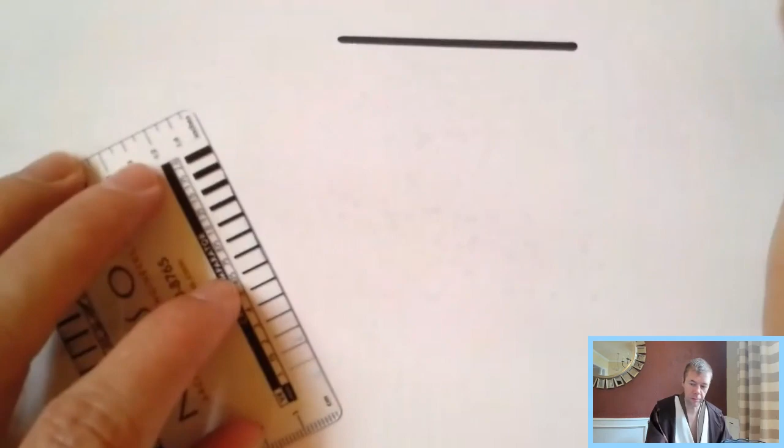Let's see here. I think this is the one I want. So let's talk about walls for a second. My class is doing a project where they are designing a building, and they get to pick where their wall system goes. Some of them are a little bit nervous. They're like, I don't know where to place it, I'm kind of concerned. That makes sense. I know I was really nervous. I didn't want to mess it up, right? And I get that approach.

Now I'm going to start out with a very, very simple structure. Just rectangular, straightforward, because you need to understand these before you can understand the more complicated structures. In this system, let's just say I have my walls over here. I have one wall here, and we'll make it really easy at first. We'll make them symmetrical. We'll do a wall here, and a wall here. And let's make those walls the exact same length. So just start out with something pretty straightforward, pretty easy to begin with.

So if I have some kind of wind load, we're going to start out focusing on wind at first, and then I will get into earthquake at the end, just a little bit. If I have wind coming in from this direction, blowing here, then what I can do is, since these walls break my system in half, and since they are the same length, I can kind of chop this in half. I'm going to take half my wind, half my tributary area for my wind, and break it in the middle here. Hopefully that was in the middle. Should be in the middle. Well, not quite in the middle, but let's just assume it's in the middle.

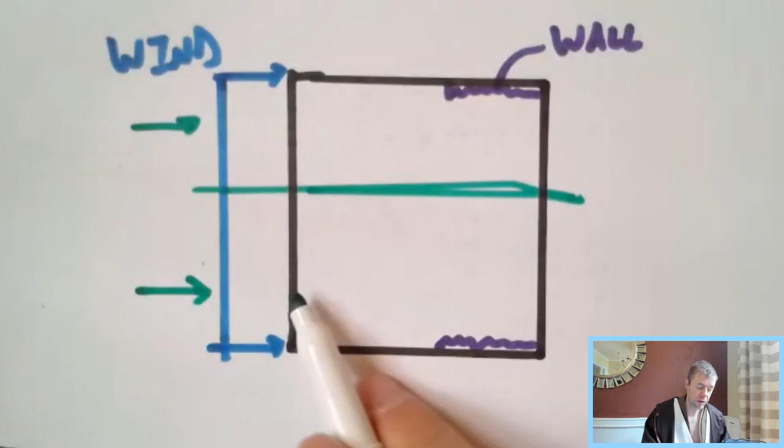Halfway between here, I'm going to take this load right here and turn it into a point load. And I'm going to take this load right here and turn it into a point load. That load is going to find its way through the system. It's going to find its way through the slab, through the other columns, through the beams, through whatever. It's going to distribute, it's going to spread out, like Jedi magic or something, and make that noise too. It's going to travel through this, it's going to actually look something like this. I don't want to draw it too much, but you can just imagine it kind of flowing through the system to here. And once it does, we're going to be able to draw, for this wall, something like this.

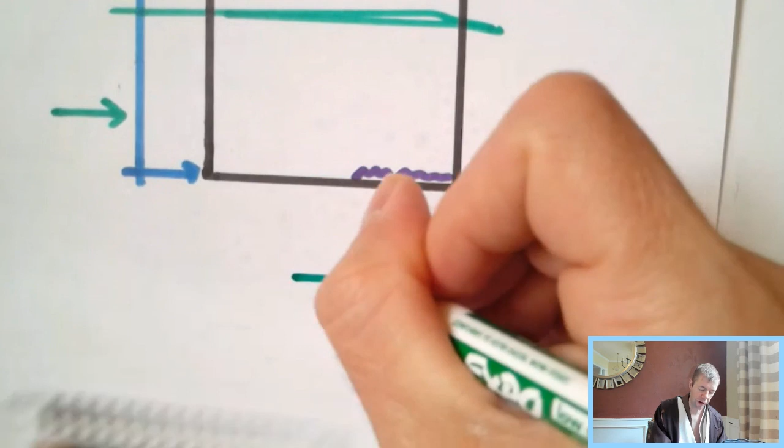And that is going to turn into point loads. Let's just draw one story for now, for fun, just to make it easy. If it's multi-story, that's what you have to take care of, that's what you have to do. So we're going to make it really simple, really straightforward. Yes, we're going to do this on both sides.

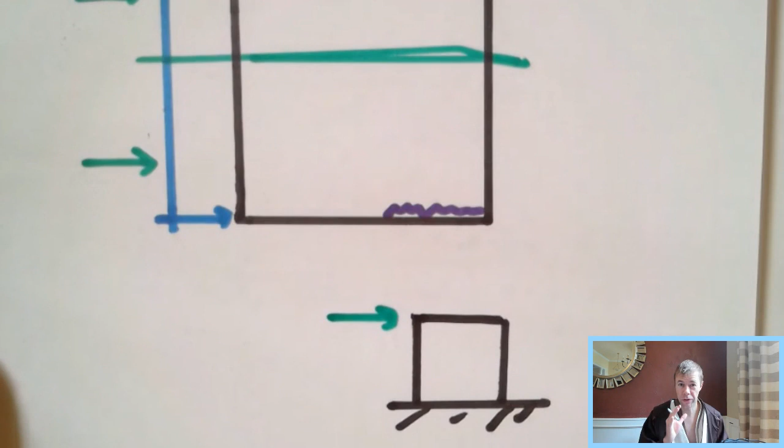If you're smart and you make your system symmetrical like this, or you make the stiffnesses the same, as in the total length of the wall, the same on both sides, it's going to behave just like this, straightforward, pretty easy. There's a video all about this where I talk about lateral load distribution. I just put it out like last week, I think.

Now, what happens though if things start to get a little strange, right? That's always what gets interesting in life. So let's say down here I have two walls. A wall here, two walls, and these walls happen to both be the exact same size, or let's not even say what size they are right now. I just say I have two walls.

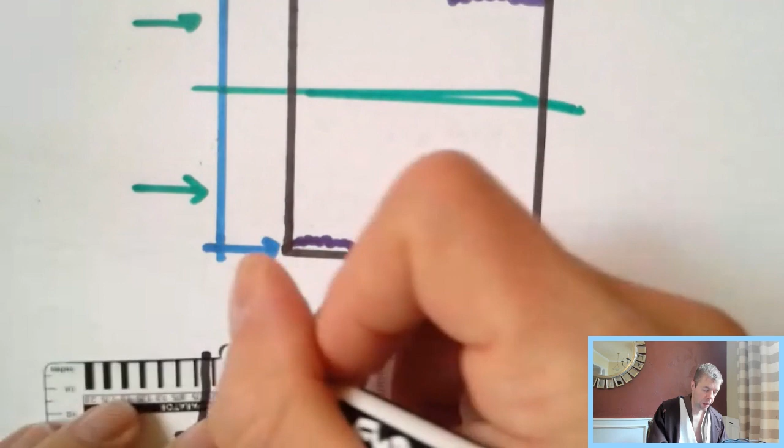Let's just say that this one has a moment of inertia we'll call I1, and this one has a moment of inertia called I2. If you remember how to calculate moment of inertia, it would be 1/12 BH cubed. You would do that for this wall, and you would do that for this wall. H in this case would be this dimension right here, the H of the wall, and B would be this dimension right here.

So let's say I want to know how my load is going to be distributed. Let's say this is wall 1, this is wall 2. For wall 1, I would take I1 divided by I1 plus I2. This would be my total stiffness, and this would be my contribution from I1.

Now let's say I have 3 walls. Well, I do the same thing 3 different times, 3 different moments of inertia, 3 different walls, same type of system. So this would be the ratio of I1 over I1 plus I2. That would be the ratio of the stiffness, and that would also be the ratio of the load. So let me just draw this in here.

So let's say I draw my load coming in here from the side, and this is going to end up being I1 over I1 plus I2, and this one would end up being I2 over I1 plus I2, something like that. That would be how they were distributed.

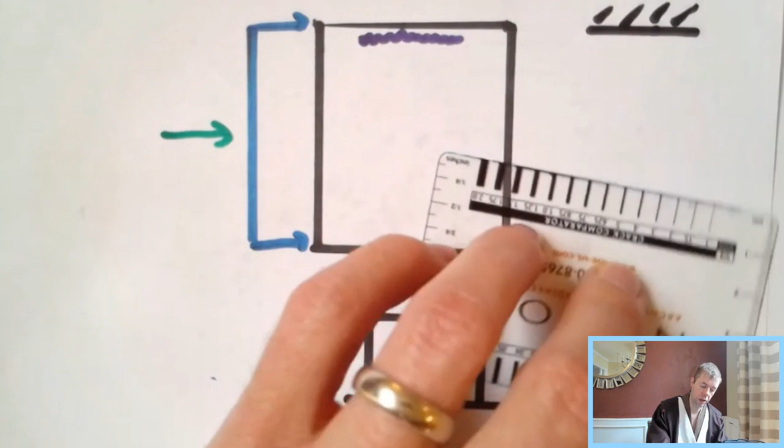You could almost think of this as a big cantilever beam. You could think of the wall as your stiffness, your support, and the body of the building would be like your beam itself. And if you have a cantilever beam that's got a distributed load on it like this, what would you expect to happen in the cantilever beam?

Well, it's going to deflect, right? It's going to deflect like that. It's going to have zero rotation there. It's going to look something like this. Well, the same thing is going to happen in your building, the exact same thing. This system is going to deflect. This is going to look a lot like that same thing I just drew.

And this is going to still be perpendicular in between. And what you have to worry about now is, what is that deflection? What is it? I don't know, and there's not a simple way to do this. This is one of those complex situations where you're going to have to use a finite element program, a pretty decent 3D structural analysis program, to figure out what that deflection would be.

And the simple way to solve it, so you don't have to do that, would be to just put a wall over here. If you could put a wall over here, then all these problems would go away. It doesn't even have to be exactly the same size of wall. You can still distribute that load by stiffness that way.

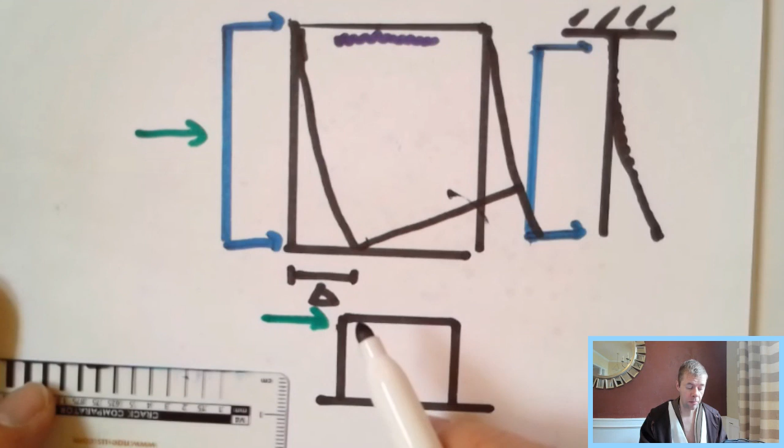And you might say, well, how do I know? Well, you would find out what your deflections were, and usually you would talk to the cladding expert - that's usually someone that's selling you the cladding, or a subcontractor that designs a lot of those - and you'll reach out to them to ask questions, like, what do you think about this system? What do you think about this amount of deflection?

And that's one reason why people don't do stuff like this. There's too many logistics, so it's much easier to put another wall over here, and then you don't have that problem. You can find a place for the wall in your elevator cores, in your stairwells. There's lots of places to put your friend, the wall.

Now let's move on to how earthquakes work with walls, just for fun. You're not designing earthquakes for my class or buildings with earthquakes, but you may run into structures that have earthquakes in them in your life, or you may be a visitor on the outside.

And thank you for coming here, visitors. I really appreciate you. We've had a lot of fun with your questions, and I'm looking forward to getting more questions from you today.

But if you have a structural system like this, we'll go back to our same rectangular building, simple, easy, whatever building. Now what you have to watch out for is that sometimes let's say I put my one wall here, and let's say for whatever reason I have to have another wall here. Let's just say, for whatever reason, that's the layout that worked out, that's where it ended up being. So here's my building, here's my walls.

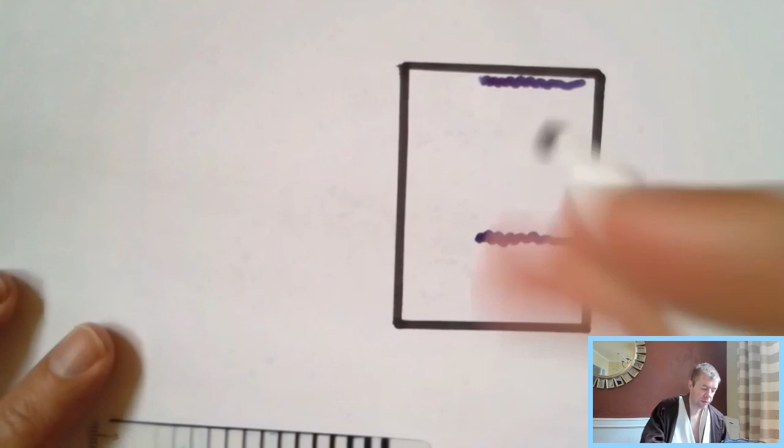Now what you have to do is calculate two values when it comes to earthquakes. You have to calculate something called the center of mass, and then you have to calculate something called the center of stiffness.

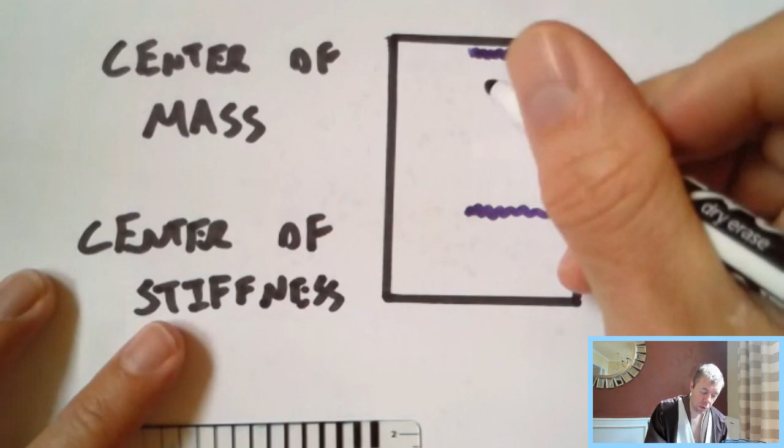Now the reason you have to do this is that the earthquake acts on the mass of the building. When the earthquake starts to shake and move around, what starts to move is the mass. Well, in a building like this, you'd say, where is the centroid at? And it would be like here. You could imagine drawing a line from here to here and a line from here to here, and that is the center of mass of the building.

So this is what's going to get moved back and forth as the earthquake goes in this direction, or if the earthquake goes in this direction, this is what's going to get moved. But let's just talk about this direction first.

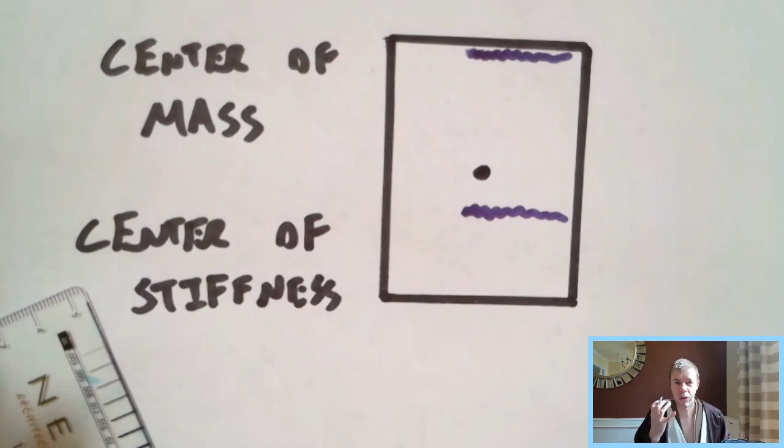And then we have something called the center of stiffness. What the center of stiffness is, you'd say, what can resist? Where is my resistance point? Well, it would be halfway in between these walls. Maybe I might draw it to be here. It would be halfway in this dimension between the walls, halfway in this dimension between the walls. So we'll call this one the center of mass, CM, and we'll call this one the center of stiffness, CS.

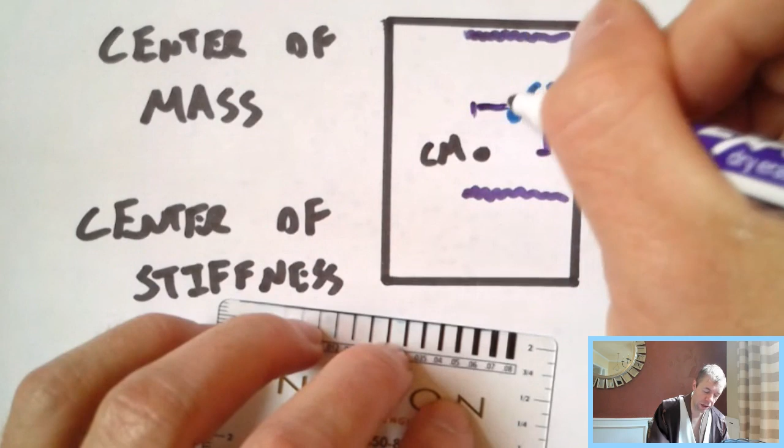Now what that means is that this is what's going to want to move, and this is what's going to want to resist it. And because there is a difference in dimension in this direction, and a difference in dimension in this direction, it's going to cause a torsion, it's going to cause a torque. As the earthquake starts to happen, if you lay it out like this, the building is going to start to twist back and forth, and that's going to put different moments on the building. It's going to cause different amounts of moments for all of your walls. You'll have walls in this direction, but also walls going in this direction as well. And this twist, this difference, this torque is going to cause different amounts of loads.

And they're going to depend on the stiffness of the wall and also the distance from the center of mass, or actually I think it's the difference from the center of stiffness that's how you determine those. There's a whole lot of stuff that goes into that.

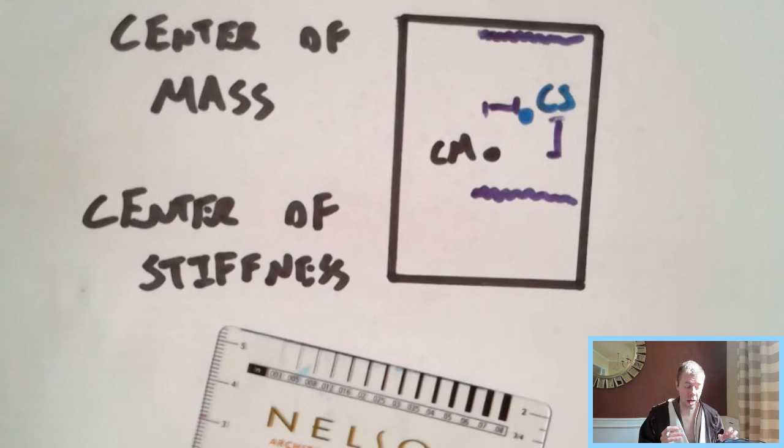I had to learn all this for my PE test. I had my PE in California, and California is all about earthquakes, so there's several of these on my PE exam. There's a seismic specific exam for the state of California. Not very fun, but I made it through.

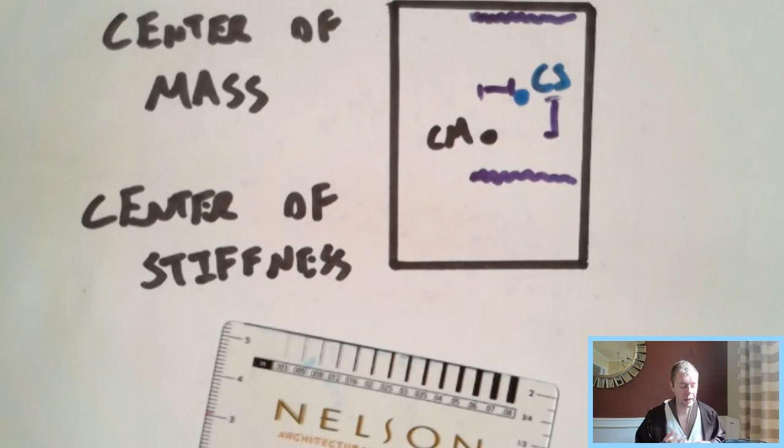So hurrah! That's kind of how that works when it comes to earthquakes, when it comes to these wall systems. Now I'm going to bring up one more topic really quick, and I think most people probably get this and understand this, but I just want to make it abundantly clear. So I'm going to talk about it, going back to my same box system here that I've been talking about.

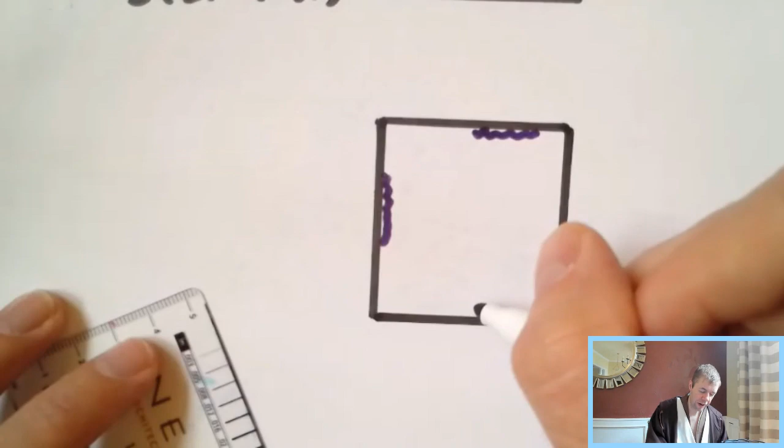There, so you can see it now. Pop my little projector, I'll pop it back. It's back. So if I have a wall that's here, and another wall that's here, and my wind starts sweeping down the plane and blowing here and blowing here, how much load goes to that wall?

Well, none. Well, that's not totally true, a very, very small amount. And how much load goes to that wall? Well, if these two are the same length, half of the load would go here. But you'd say, what? This is a wall. I thought load is distributed to the walls when you have a lateral load, when you use walls as lateral load resisting systems.

Yeah, that's true. But any wall that is perpendicular to where the load's going in doesn't do anything because the stiffness is so small. Think about how to calculate the stiffness for this wall.

It's like 1/12 BH cubed. And then you have this wall, which you can use the same 1/12 BH cubed, but the H's are totally different. The H in this case is here, and the H in this case is here. This H may be 12 inches. This H may be like 20 feet or something like that. They're totally different, not even remotely comparable to one another. And so because of that, we ignore this. We assume all the load goes here.

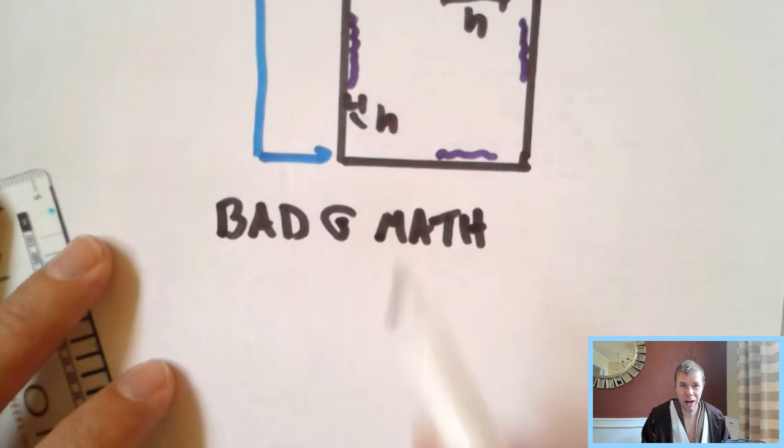And I got a comment over the weekend that was pretty interesting on some of my videos. They told me, Tyler, it was about my Jedi video. They said, you are bad at math. Bad at math. Well, yeah, they're being exact. They're saying if you exactly calculate how the load's distributed, then there will be some load that goes here. So you're bad at math because you're leaving things out. That's what you do when in math - when you leave things out, you're bad.

You mess it up. But I told them bad at math can equal good engineering. Well, we'll just say I wrote engineering there - can't even spell engineering, don't have enough space to finish it. So there you go, I'll put the G on the end. Bad at math equals good at engineering.

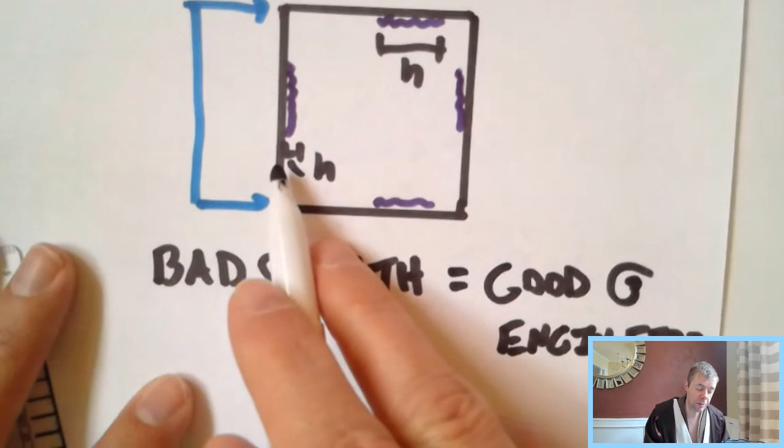Because I don't need to spend my time - the most valuable thing that I have is my time. I don't need to spend my time finding this answer exactly when I can find the essence, the best estimate, and get myself done so I can go watch more Netflix. Yeah, that's what you want to do when you are an engineer. You don't have to worry about getting the math exact. Now, I don't mean making horrible, sloppy errors - that's not what I'm talking about. I'm talking about if you're intelligent, you can realize when you can do bad math, but yet be a good engineer.

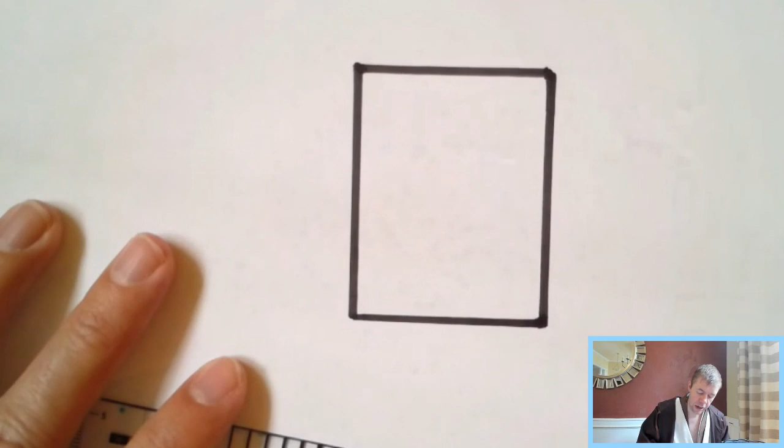If I have a structural system that looks something like this, let's say I'm going to draw two different structural systems. One that's very straightforward, columns that look something like this. And then one down here that looks normal, and then all of a sudden, for some reason, my columns are offset. You might say, what? Why would that happen? Usually it's because there's some kind of architectural treatment or special thing the owner wants that doesn't allow you to put all your columns in the places that you'd like them to.

That happens. So if we were doing this same thing I told you about before, where we have our lateral loads coming in here and here - now I didn't draw all my columns in, but what I would do here is find my tributary area for this system, let's say it's here, and find my resultant load, let's say it's here, and put it on that structural system over there. I would put it right there - boom, boom, boom, boom, boom, schmack. I put the load right there. That's what would happen for this one.

Now, the question was, though, how do you handle this one? What do you do here? This made sense - everything's in a line. What do you do here? Well, there's a couple ways to do it. One way is that you could put this in 3D in a program, and you could load it up just like you would here.

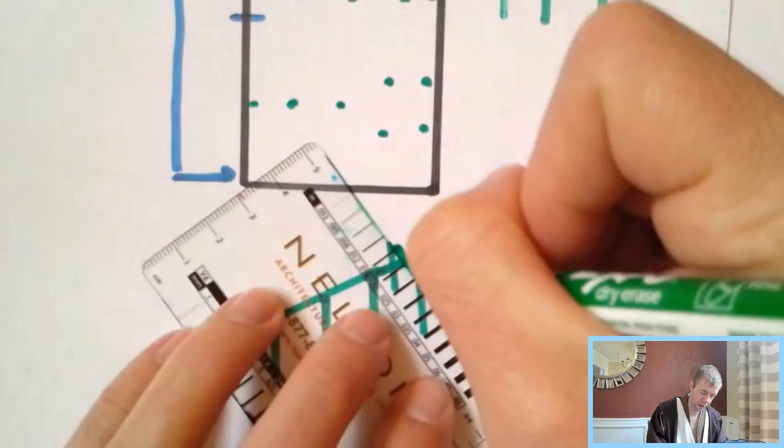You could put the whole thing in 3D. Let's say I'm going to try to draw it in 3D - column, column, column, column, and then these columns kind of split. There's a column in the back, column in the front, column in the back, column in the front. And the beams would go like this, this, this. 3D, baby. And then you put the load on it like this, and you would see how the load is distributed.

I think that's what a lot of people would do, but a lot of people wouldn't want to think about it. They wouldn't want to get to it, they wouldn't want to deal with it. So they would just do something simpler. And that's fine, there's nothing wrong with that.

But there's still a way to make this into a 2D problem, and there's a couple ways. One way is to ignore these columns over here - you could ignore them if you wanted to, and just make your structure be these 3 columns right here. There's actually nothing wrong with that.

90% of the time, there's nothing wrong with ignoring stiffness because it's still there, it's still going to help you - you're just assuming it's not there, assuming there are no columns over here. Instead of having 5 columns, I could just do it as 3 columns. And there's actually nothing wrong with that. Zero wrong with that.

And you could put the load on it and solve it and everything would be great. I would probably go ahead and use the same size columns and the same size layout over here. There's nothing wrong with that - you can do it that way.

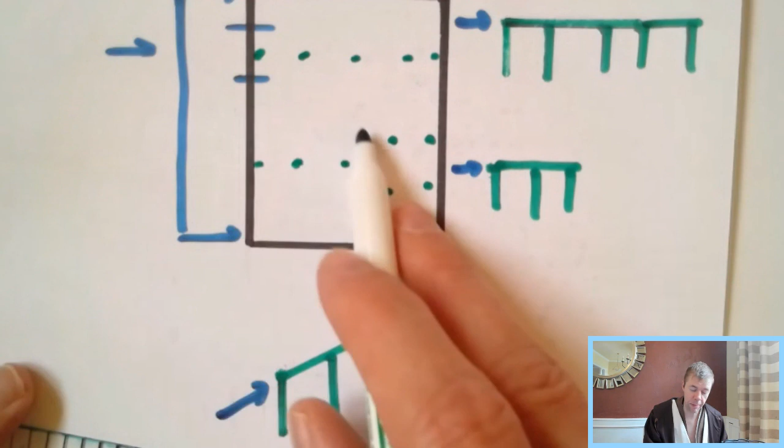Another way to do it would be to take these structural systems and maybe even split their stiffness up - take half the stiffness from these and half the stiffness from these. Again, I'm assuming this happens over here as well, but maybe it's not half, maybe it's some part of their stiffness. Make my own columns - this column would be here, this column would be here - and I could take some of the stiffness from these columns, some from these columns, and make my own pseudo column here.

So if everything's laid out evenly, this makes it easy. I could take half the stiffness and put it here, half the stiffness and put it here. What do you mean by half the stiffness?

Well, I could just assume that this bad boy is a 12-inch by 12-inch column. And let's say that this bad boy - to make the math a little easier - is a 14 by 14-inch column. 12 by 12, 14 by 14. I could take half of this depth, which is 6, and half of this depth, which is 7. And I can make myself my own column here that would have a dimension of 13 inches by 13 inches, and I can rock and roll with that in that structural system.

That's doable, there's nothing wrong with that. You just have to have a logic, you have to have a reason. And that logic can't be totally crazy - it has to be believable by other people.

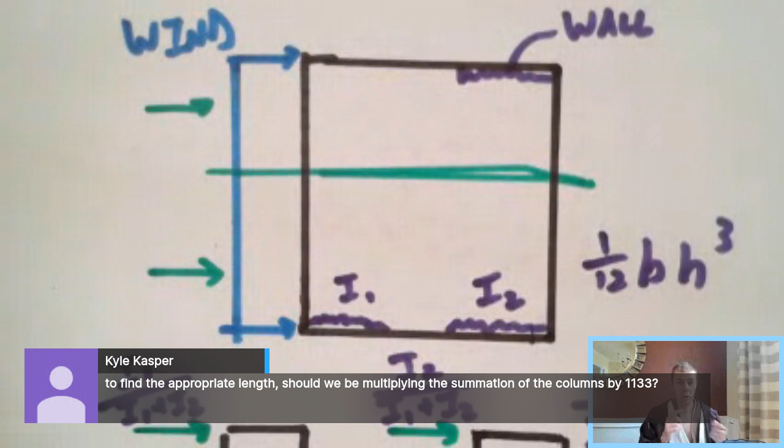So what you do in a wall section is, typically, you will know for certain areas of the country whether you're dealing with wind or seismic. From your past designs, you will know about what length of wall you need to be satisfactory. And what you're going to find is that the answer, a ballpark number, is most of the time something around 20 feet-ish. If you can get about 20 feet-ish in most moderate sized office buildings, then you are usually pretty solid.

Usually pretty solid. And that's not true as things get really, really wide in this direction, or if things start to get really, really high. And you'd say, well, okay, what do I do then? Kyle, I wish I had a great answer for you, and I don't.

What you're going to have to do is find out what works and what doesn't. If you've noticed through my videos and in our class, sometimes I have known the way through the maze and I've shown you that way. I've said, hey, go this direction, this is going to help you, this is going to save you time. There are some times in your life where you're going to work on things that no one else does.

You're going to do something unique that no one else does. And in those cases, you are going to have to figure your own way through the maze. My own way through the maze? How am I going to do that?

Well, that's why we give you this project and things like this. That's why you ask great questions. And if you can't find someone that can give you the way through the maze, or even if they give you the way, you need to check that way. You need to stress test it to make sure it's right, to make sure it works for your cases and for what you're wanting to do, because sometimes it may not. It may work for them, but it may not work for you.

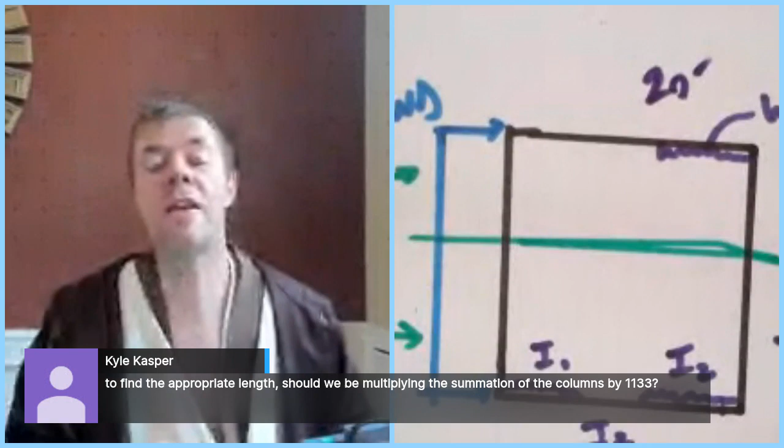So when is it not close enough? Well, you need to make that decision for yourself. And when it gets to things like 75% to the wall, 25% to the columns, that's when I start thinking, okay, we need to make sure this column system works, or I'm going to be looking for ways to make my wall longer. That's what I'm going to do.

Hey, thank you. You must like Jedi robes. Thank you, I really appreciate that. That's so kind of you to say. Oh man, we got another one in here. Hey, thanks so much, I really appreciate you tuning in.

So Luis asked an interesting question. Luis, thank you for asking great questions last week, and thanks for coming back with questions this week. Luis asked, do you think the problem with Citicorp Tower, and I have a video about that, you should check it out, it's one of my most popular videos, was related to the stiffness arrangement of the columns, or was it only because of the area exposure to wind loads? It was both. I had content that explained this, and I should probably make a follow-up video about this, in all honesty, Luis. So thank you for asking this question. We'll answer this really quickly, and we'll try to get back to the other folks.

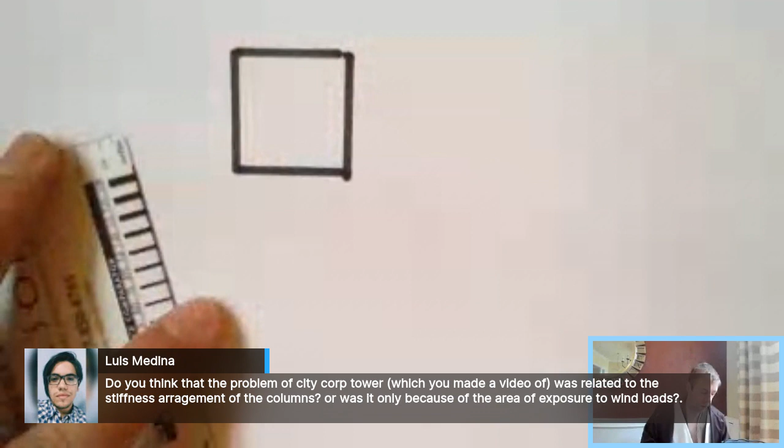So in the Citicorp Center, what originally happened, and this would be a great lead-in if I do make a video about this: the Citicorp Center is a very, very tall building in midtown Manhattan, massive building. It was a skyscraper, and they were putting their columns in the corners, going to be super columns. They also had an elevator core in the middle, that went something like this.

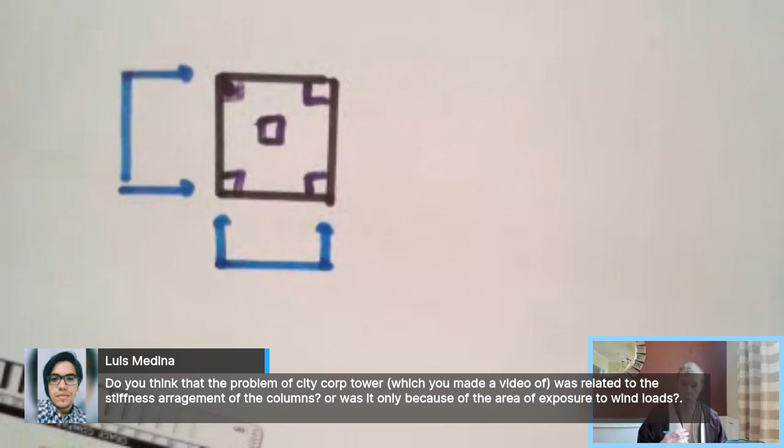So it's very timely, ties into exactly what we're talking about with wind loads. The wind loads were coming from this direction, and from this direction. And in systems like this, boxes like this, they work great. Everything is good, they're stiff, everything is wonderful. And what they found out is after the architects had done this design, at one of the corners there was a church that was there.

And that church didn't want to move. They'd been there a long time, and they positively did not want to move. So what the engineers did is they said, I'm going to take these columns and move them. I'm going to move them here, here, here, here. And I'm going to leave my elevator core in the exact same spot.

So I'll draw the new building over here. It's going to look a lot like the old building, a lot of the same dimensions, but now it's going to have these bad boys here, here, here, here, and then elevator core in the center.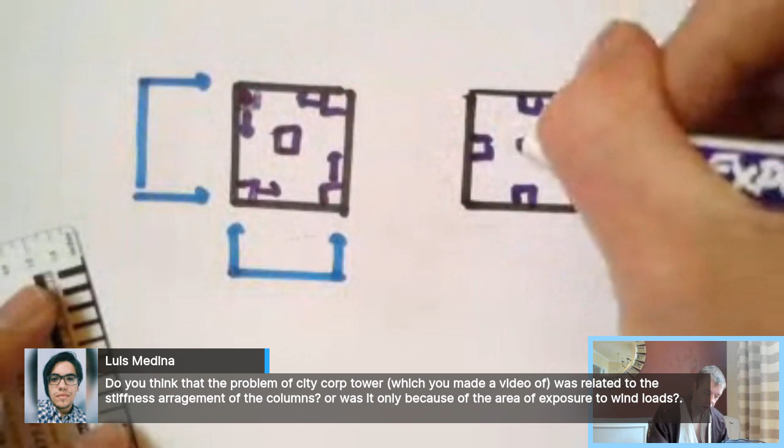Now, in this case, what the engineer did is they said, I needed to move these. No big deal, I'm still going to put my same winds on them. No big deal. And they did this, they did the analysis like this, they did everything like this, and everything they said was fine. It was going to work out.

But one thing that they didn't check in this type of system: if I have what's called a quartering wind—this would be a little bit strange, but this is a wind that comes at a diagonal. If I come from this dimension back, and if I come from this dimension back, this would be a wind that comes from here, a quartering wind.

If I have something like this, the quartering wind is taken by this column. This column seems more stressed, because if we think of where the center of stiffness is, the center of stiffness is here, but you're still going to have more load on this system. But this column is closer—this column is closer, so it's further away, it's more stable. You get more benefit because the eccentricity is larger. The leverage is better because that column is further away from that center of stiffness.

But now if I put my same quartering wind over here, same quartering wind, same thing, everything's the same, and the load comes here, and my load comes here. Now my center of stiffness is here in my system, and now my columns are not near as far. The leverage that these columns have is much, much, much smaller.

And I calculated it—I have notes on this, I've had calculations like this. I didn't put it in that previous video because I don't know if people would want to learn about it. So I probably should make a follow-up video where I explain it even more.

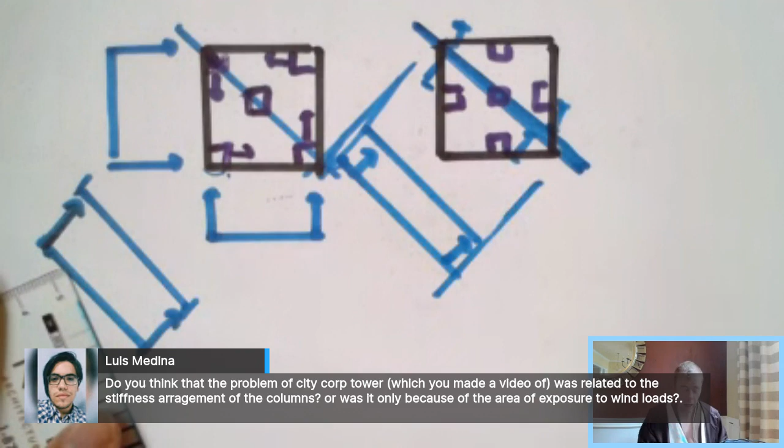But with this quartering wind, now that there's this column that's closer, these loads actually go way up in this system. They go way up because you're just much closer—your feet are much closer to this center of stiffness here in the center, and because of that, the bracing in this system was overloaded.

And they actually thought originally that it was going to all be in compression. The entire system was going to be in compression because the loads above it, coming in and out of the page, were going to be so high that they were going to keep this in compression and keep the diagonals in compression—the lateral load resisting system. And that no longer was the case.

When you do something like this, you get more uplift, you get more tension here. And because there was more tension, those things that they thought were going to be pure compression—I've even got drawings of the details, or some drawings of the details. They originally made them, and they were steel connections.

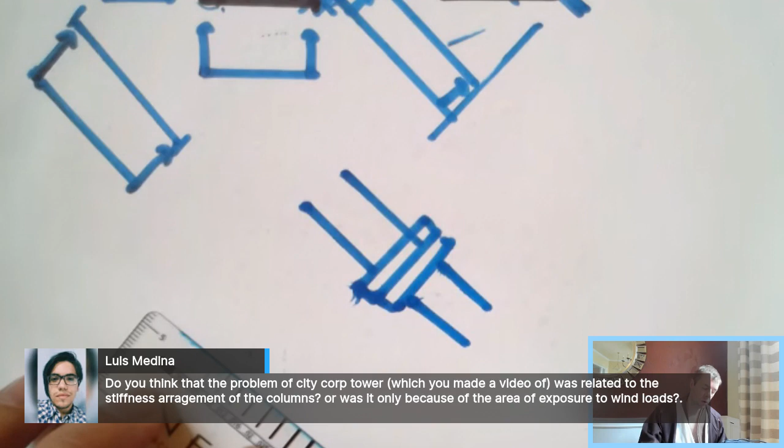They made them look like this. They had a bolt, they had a plate on the opposite side that looked like this. They had a column that looked like this, and they had bolts—so they had bolts over here, and they had a bolt in the system. And originally it was all in compression, but once this happened, these went into tension, and they didn't figure it out.

Here's the crazy part: they didn't figure this out until the building was already done. Like, the building was already constructed and finished.

And how they figured it out is that there was an undergraduate student doing a report on the building, and during that work she figured this out. She actually did the calculations herself and figured out that it didn't work, that something wasn't right. She had all the calculations, she had all the layouts for the building, and she figured out that it didn't work.

So she alerted them and asked some questions. And actually, they assured her at the time that there was no problem and nothing to worry about.

And then there was, and they figured it out. It's a very cool story. You should watch the video and the interview. The student found me, she contacted me and said she watched my video, and she's the student from the video. She gave me her papers that she worked on, and her story checked out. It was unbelievable what she did. It's a really cool story, you should watch the video if you haven't seen it. So let's keep moving.

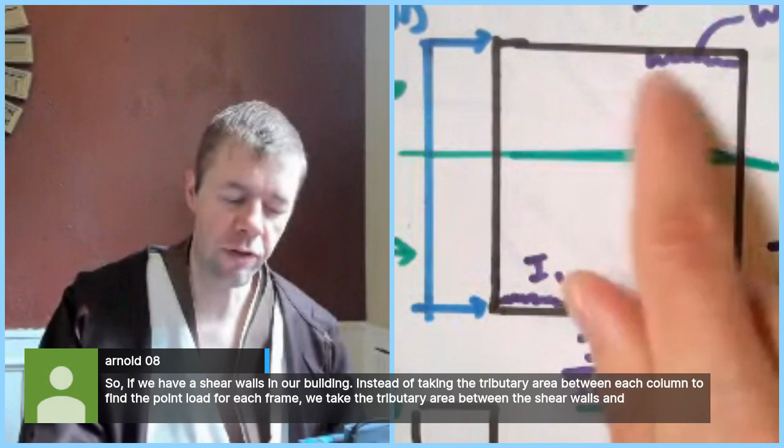Arnold asked a two-part question. He says, if we have shear walls in a building like we've been talking about before, instead of taking the tributary area between each column, we look at the tributary area for the wall, right? So cut the building in half. This would be half the tributary area for the walls, and half for these walls. And all of that load, instead of going on columns, it just goes to the wall. There's a video about that, lateral loads. If you haven't seen it, check it out.

And we don't put it on the frames. That's right, we only put that point load on the wall. That's exactly right, that's what this is talking about. If you haven't seen the video, you should check that video out.

Okay, so here's a question. It was, why design a system as continuous beams instead of simply supported beams? So that's a good question.

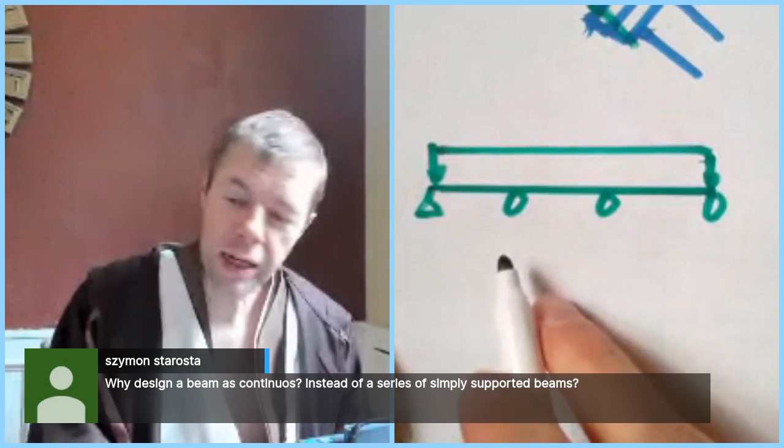Let's just say I believe what the question is, and if it's wrong you can let me know. If I have a system like this, and I draw it like this, and I have some kind of load on it, we'll just say it's a distributed load for fun. This gentleman is saying, why am I designing it like this? Why not break it up into a series of simply supported beams that have the exact same dimensions? These would be the same, this would be the same, this would be the same. The loads would be the same. Why not do this?

And if you do this and find the moment on this, it would be WL squared over 8. Yeah, it looks like a parabola, and it's WL squared over 8. And if you do it on some system like this, it will be less than WL squared over 8, and it will look more like a bunch of continuous beams. It's going to look something like this. And these maximum positive moments will be less than WL squared over 8.

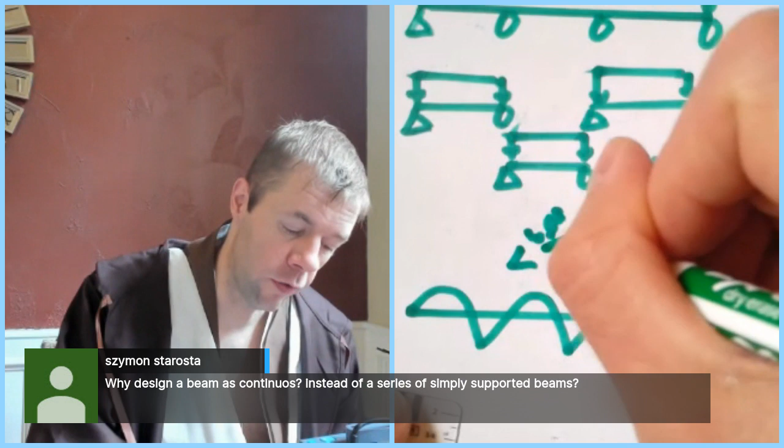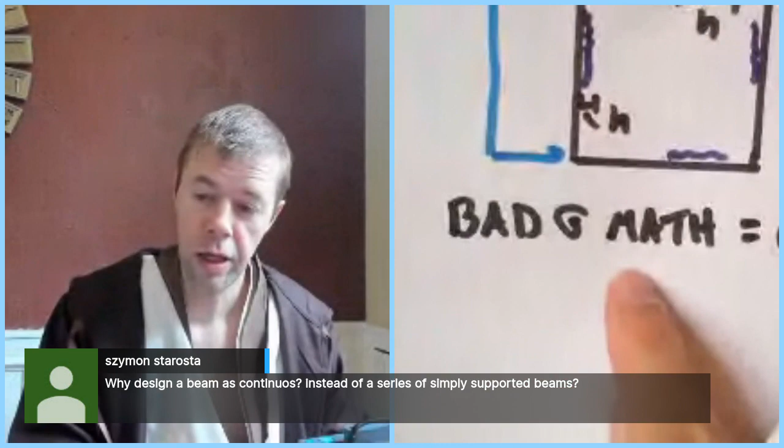And you might say, so what, why not just do this conservative one? Well, then you could say, that's true, that would work for the positive moment, but then what would you use for the negative moment down here? Well, you could if you wanted to. This is totally legit, again this goes back to the same mindset of bad math equals good engineering. What you could do is actually use WL squared over 8 for this negative moment as well. You could use it for the positive moment, you could use it for the negative moment, and you would be conservative. It would work and be fine, nothing wrong. That is legit, a fine way to solve that problem, but it's a very conservative, extremely conservative way to solve it.

In the modern age of structural analysis software, which isn't very hard to use and is pretty straightforward if you put a little time into it, you can put this in pretty quickly, put some loads on it, and get a better estimate than just WL squared over 8 here and here. When you have that better estimate, it will help you get a more exact design and save your client money. Now, this isn't always worth it - sometimes you do something very conservative like this, and that's fine. This is a fine way to check your loads, and a great, cool back-of-the-envelope approach. But when it comes to really designing, most people, in my experience, don't use something like this. They'll spend a little time putting it into a computer program to figure out the moments and shears and better tune their design.

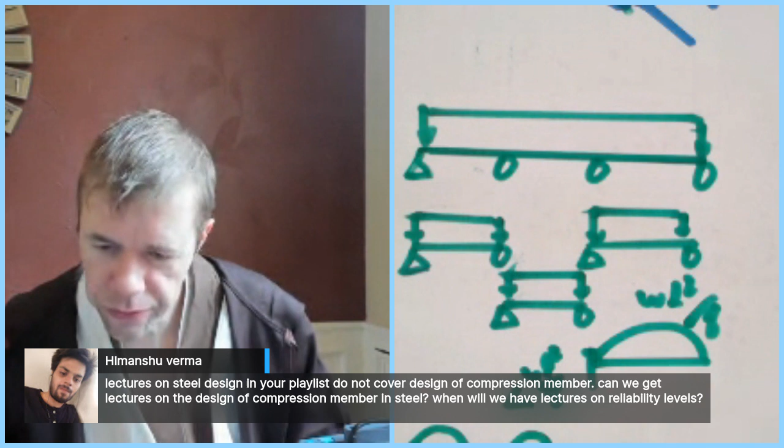This says lectures in my steel design playlist don't cover design of compression members. Oh no, there are tons of videos about design of compression members on my steel notes that are posted online.

It's all about buckling, right? Steel doesn't fail in compression as in crush - steel buckles in compression. There are tons on there and you should check it out.

Now, reliability is not my thing. There's Dr. Solomon at Oklahoma State University - he's a guru in steel reliability. Check him out if you want to learn more about reliability of steel structures. But there are tons of videos about steel failing in compression on my notes, some really, really cool ones.

Awesome, this is a great question. Is there a minimum thickness for shear walls that need boundary elements? We've got in Colombia structural systems that have really big problems, so this is a great question.

Now, I'm not going to probably give you the most satisfactory answer - I'm going to give you a stepped answer on this. I don't know your problem, I don't know your situation, I don't know what you're doing, and so it's very dangerous for me to make comments exactly about what you're up to. So I'm going to make some general comments that will help most structural engineers, and I hope it can help you as well. But I have to be very careful here, not taking what I'm saying as exactly applying to your situation, because it may not.

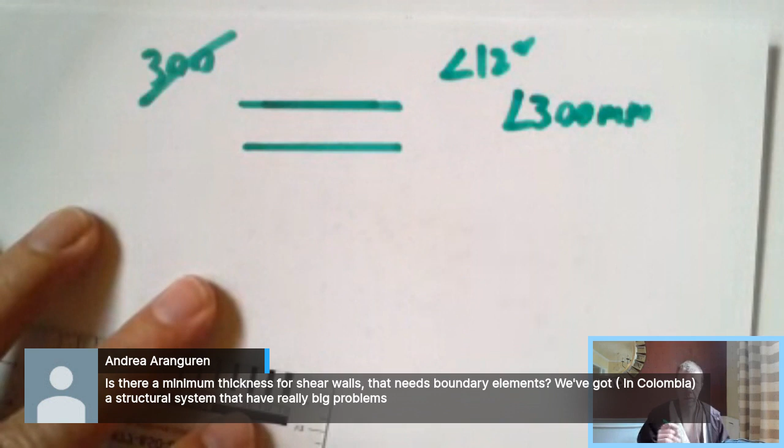I did the conversion quickly. You're never going to want to go below that - that's just the absolute positive minimum for a major structural wall, without doing some serious calculations and serious figuring on an actual structure. And that's for a major, like commercial, building. Now if you were going to do a residential building, then you could probably go less than this, and that's something you could check out and see what actually fits for you.

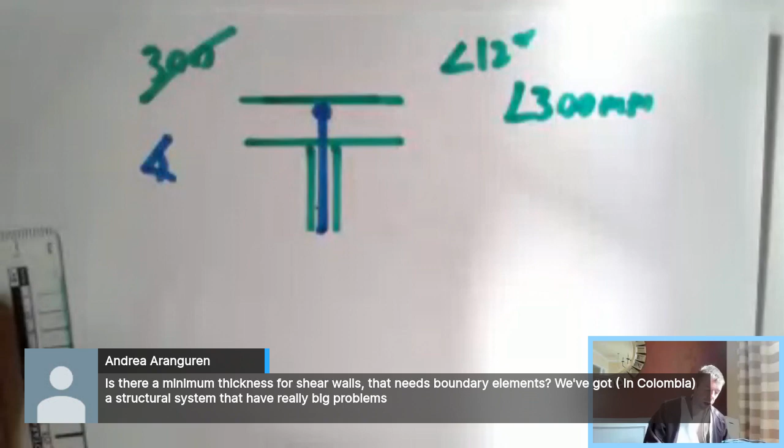Actually do some more calculations. Now, another thing that almost always controls when it comes to a wall is anchorage, is development length. So if I have a beam framing into this wall, coming in this direction, I have to have my bars come into that wall, and actually hook them down. So if my eye was here on the side, then what I would see would be a beam coming in, a beam coming in. Here's my wall, here's my wall, here's my wall, and then I've got my stuff coming in and actually anchoring into the wall.

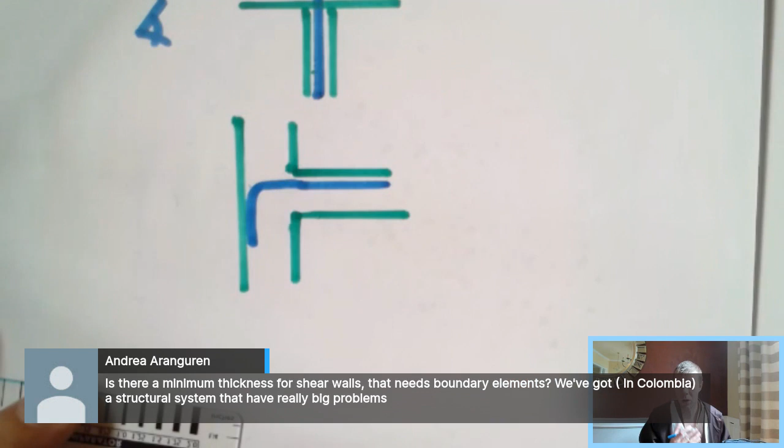Believe it or not, this hook dimension often will control the thickness of your wall. Often. And actually it'll control the thickness of your columns a lot as well, in a lot of structures that I've designed in the past. May not be true for you, but it's what I've seen.

Now, if you use something like a headed bar - they're not as common, but in seismic areas they're becoming more and more common. Let me adjust something here, let me adjust the force a little bit. There we go, hopefully that'll work out for us. Yeah, dangerous to play with the force. Yeah, didn't quite work - move it here. There you go, I'll just go like this. Sorry for the color change.

If you have something like this, it almost always controls the thickness that you would use for your columns and your walls.

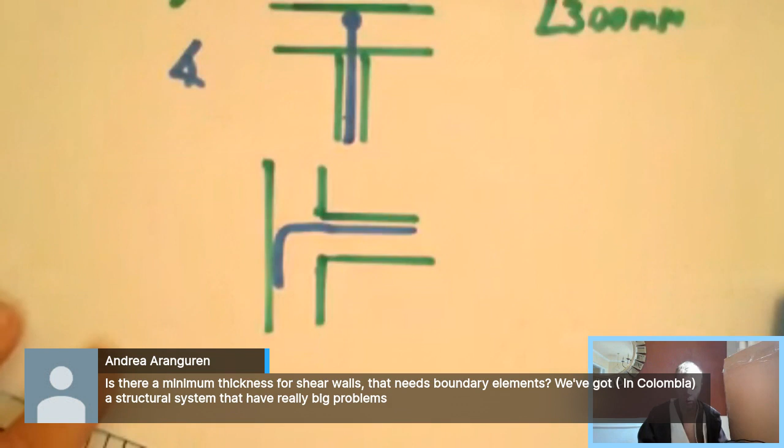So as far as putting that wall in, if you're adding this wall and you don't have something like this, then your calculations are going to help you figure this out, and the thickness doesn't matter as much because it looks like you're retrofitting. From what I can see, you're trying to retrofit in something.

Oh, that doesn't look good. Yeah, that's just kind of where it's at. Let me move this here. All right, that's better. Let's keep moving.

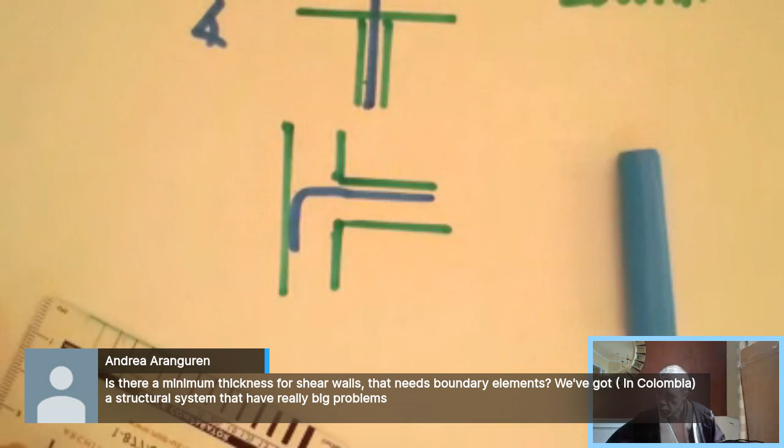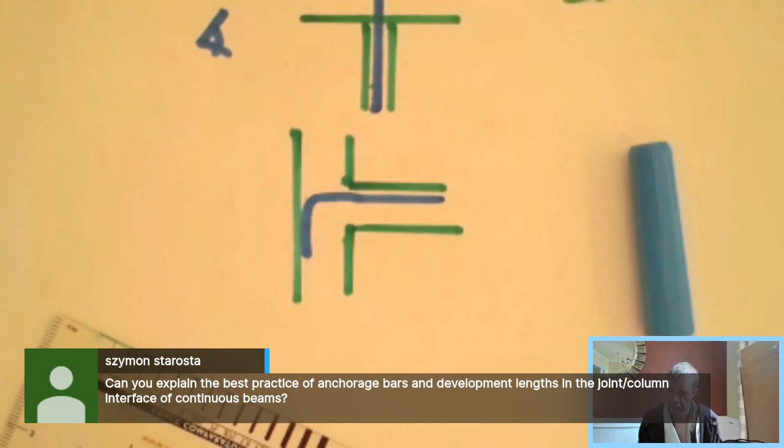Let's see. Oh, here we go. Explain the best practices of anchoring bars and development lengths in the joint column interface of continuous beams. Great question. Hard question.

If you've not had strut and tie modeling, if you do not know what strut and tie modeling is, I talked about it in my last livecast a smidge. If you don't know what that is, then you need to learn it. It's very, very, very powerful.

So let's talk about this, and I'm not going to give you a full answer. I'm sorry, it would take like 20 minutes to truly give you a full answer to this question. I probably should make a video about it. It's kind of complicated though, so I'm just going to try to do a gloss over here.

So if I have a structural system, a set of continuous beams here, I'm just going to draw a part of that. And we'll start talking about the interior joint first.

I have a video I just published yesterday about some of these topics. But when it comes to your reinforcing steel, you need to anchor it well at your outside column, and then you're going to need to extend it. You need to have at least 2 bars go the entire length. So these bars have to go the entire length.

You're gonna have to lap those bars at some point. I would try to take them past the first bay and lap them here, but it just depends on what your bays are and where you can. I might try to lap them instead not where the moment is maximum, but where the moment is minimum, about the third point or about the quarter point in this span.

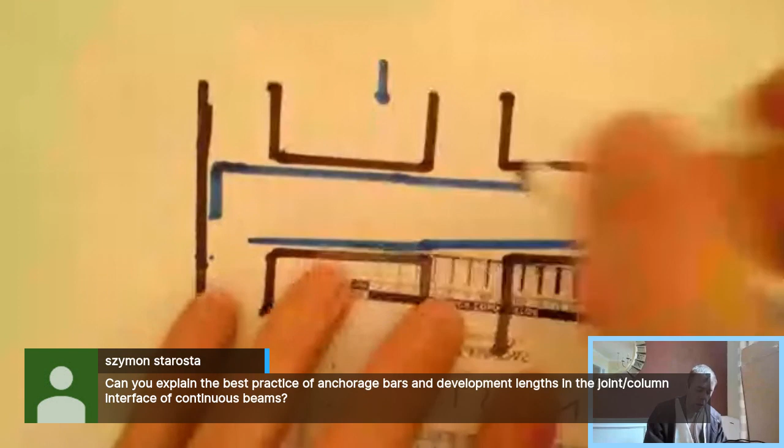This is the joint. This is what the question's all about: how do you do the steel layout in the joint? And now I have to have column bars. We haven't talked about columns yet in this class, but there will be column videos coming out. I'm shooting them now. So my column steel is going to look something like this.

Now I'm going to have stirrups. Those are the shear stirrups that I use to design for these. They're going to look like this. And then I'm going to have stirrups that go here. And then I'm going to have stirrups on my columns as well, doing the same thing, going here.

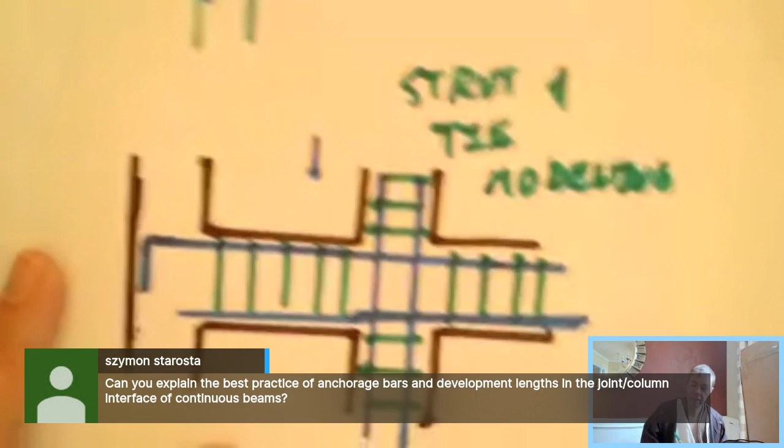Very, very, very, very powerful. And I've got papers on it. You can find my papers on it, you can find other people's papers on it. It's in the ACI design code. I don't love the way that they treat it, I think they're missing some of the philosophy behind it.

But you can use a strut and tie model to check these for your moments. And my experience is these work really, really well and don't have problems in interior structures for most strut and tie models, because the dimensions and steel layout that you need at the interior columns are usually not a problem.

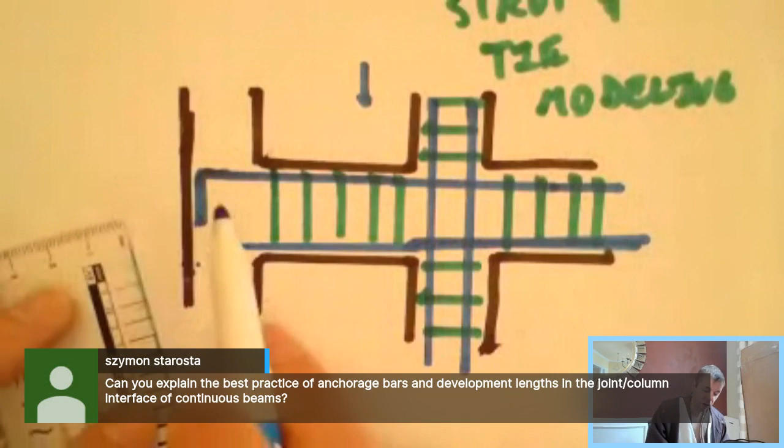Now, what gets more concerning is when you have a system like this. So we'll put our same steel in. We're going to have our anchorage over here. We're going to have our column steel come down here, and our column steel come down here. And then we're going to put our stirrups in here and put our stirrups in here.

Most of the time, you do not include stirrups in the joint. Most of the time, you do not include stirrups in the joint. If you're worried about that, then you can do something called a strut and tie model again.

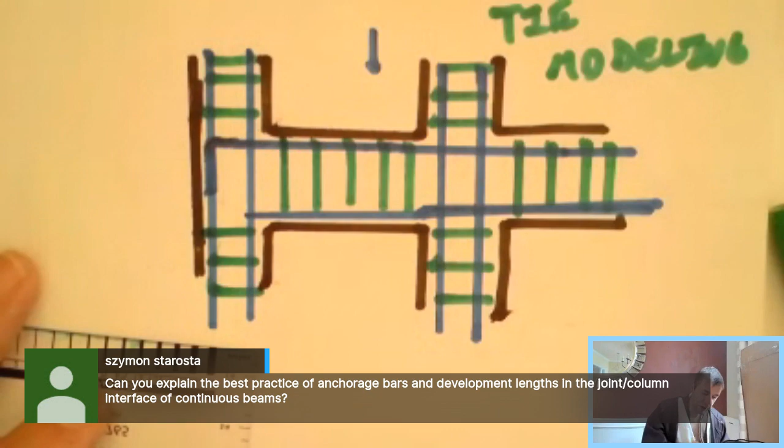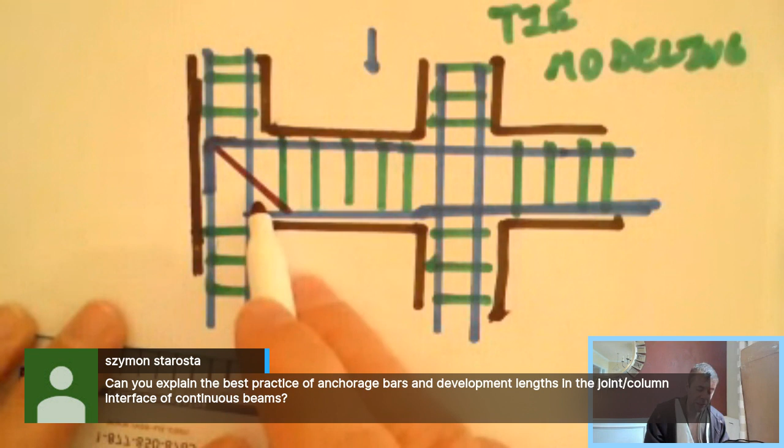What a strut and tie model is going to do in this case, you look and see: if I have tension up here, I'm going to have compression down here. So my strut is going to look something like this, and my tie is going to be something like this. And you're going to see, is that system going to survive? Is this truss that I envision in my head going to have the capacity it needs to survive this type of system and these type of loads?

Most of the time the answer is yes. Sometimes in seismic it's not, and you can get reversal of loads. So this doesn't have to be in tension at the top - sometimes this can be tension at the bottom. In that case, your strut is going to have to look like this. The first strut I drew would go away; it's not there. You'd have a strut that would appear in this direction, and you would have a tie down here. Now sometimes this is where you can start to have an issue.

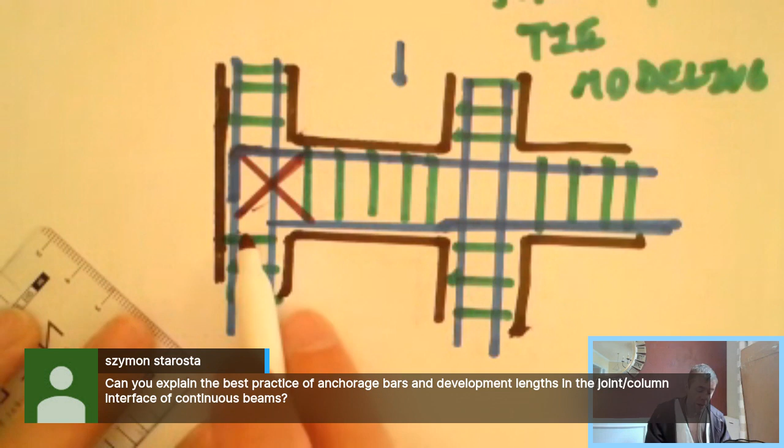Now if this was in compression and you don't have a way to transfer load here, that's something where you might need to add an extra stirrup right here. You might need to extend that bar all the way, extend it and hook it, or extend it and put a head on it. There's a lot of different ways, and this is the problem - these are the details, these are the issues you can discover when you truly understand strut and tie modeling and think about all the different load cases that can be applied to a structural system.

All right, let's keep moving.

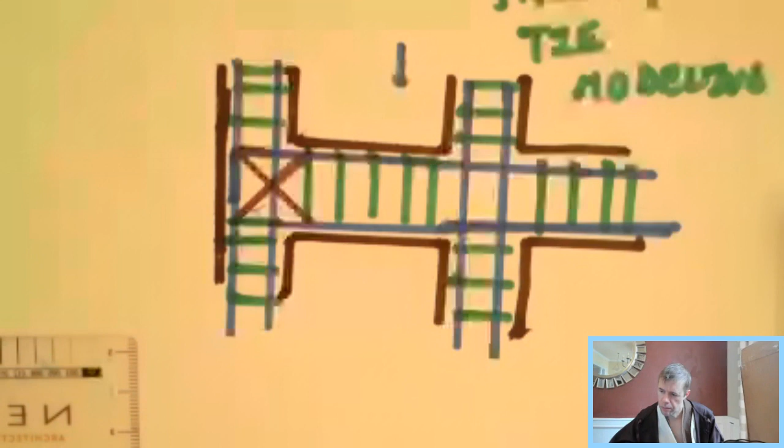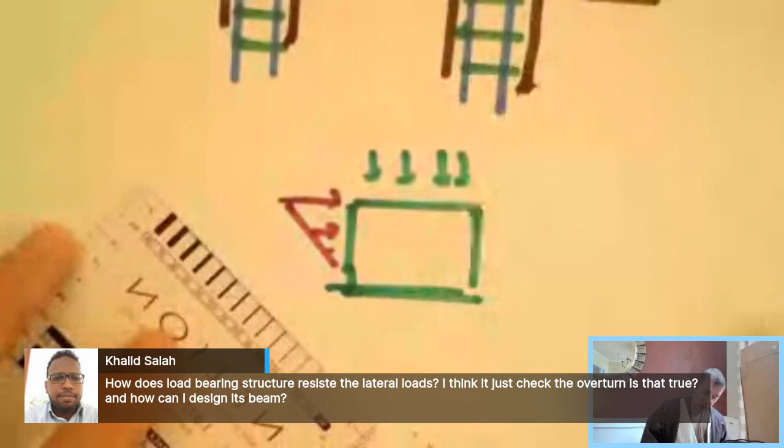Here's a good question: how do load-bearing structures resist lateral loads? If I just check the overturning, is that enough? So the question is, if I have a gravity load system - a wall or whatever structural system - that is so heavy, there's so much dead load coming down, that when I put my wind on it from the side, usually my wind loads look something like this, except in our project I just made them uniform. If this dead load is high enough, there'll be so much compression that this won't have any uplift.

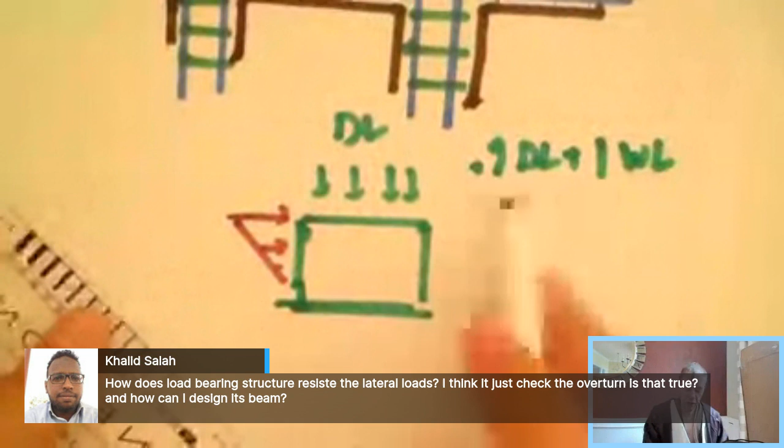You have to remember there's one load case you have to check for this: 0.9 dead load plus 1.0 wind load, I believe that's what it is - just doing it off the top of my head. You have to make sure that, at least in ACI, you only use 90% of the dead load plus the wind load. If this is still true, that when this wind comes blowing you don't have any uplift - like zero, none, nothing, doesn't go into tension - then you can be okay.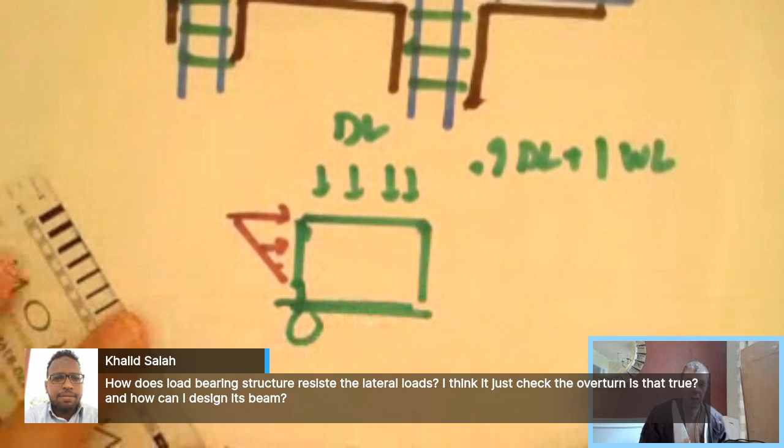My bar has gone down to red here on my internet, so I hope it's not horrible. Anyway, in this case you don't have to actually even design your lateral load system - you can just use gravity loads for this and you'll be fine. So let me check on something just a second.

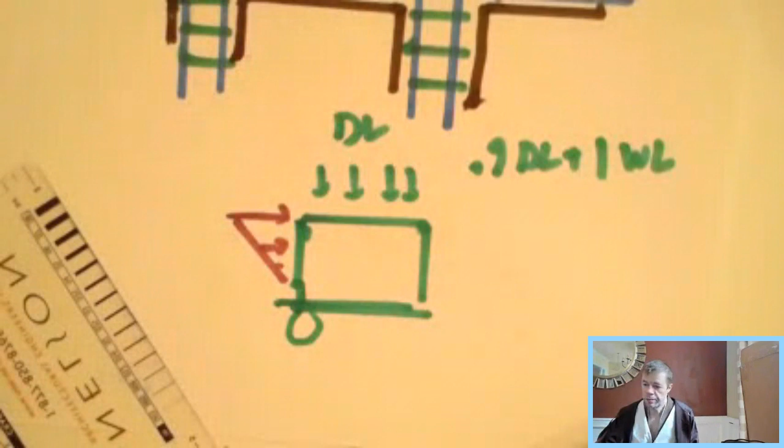This one says: while designing shear walls or bracing to resist lateral loads, why don't we just use dimensions of the wall? You can, but that doesn't always help - you can't always do that. Sometimes architects, buildings, whatever, they don't allow you to do that.

So I usually use, and this isn't something I do a lot of, so you may have a better answer out there than I do, but I just use something like the summation of I of all elements. You asked for center of stiffness - you would do something like a centroid calculation, only with stiffness. You'd look at the stiffness of the member times the distance from the center of stiffness, sum all of those in the numerator, and in the denominator it would be that for that member. I would use something like that to find the center of stiffness, kind of like what I showed before.

Let's see, this is the last question I have that's showing here.

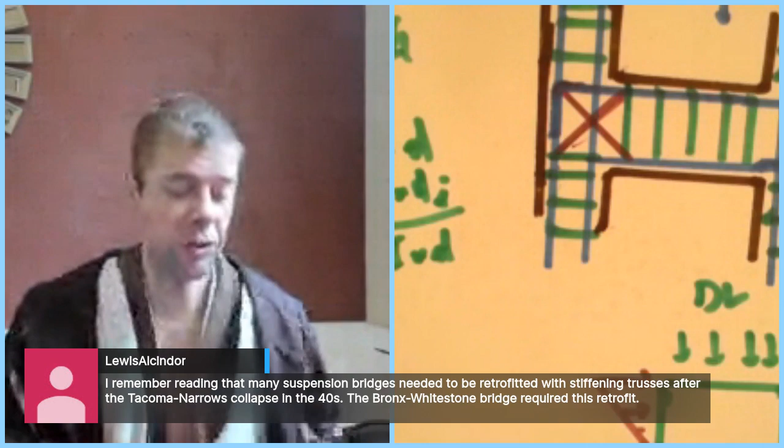Need to be retrofitted with stiffening trusses after Tacoma Narrows collapsed in the 40s. The Bronx Whitestone required this. Yeah, that's true, they did. A lot of suspension bridges did require retrofitting because of that, and it was because they made them very, very slender. They made those deck trusses very slender.

And I don't see more questions, so after this one, if this is the last question I have, then I am going to end this sucker up. But what happened on the Tacoma Narrows Bridge is they made the system very, very slender, extremely slender, and these are the suspenders here, so as it would deflect, as the wind would start to blow and come from this direction, the system would start to deflect.

And once it did, it would start to act like a wing on an airplane, and it would actually catch the load. And so when that would happen, it would start racking in the other direction, and it would catch it in that direction as well. And it would do this over and over and over again, keep catching the load, and it would be like a swing almost.

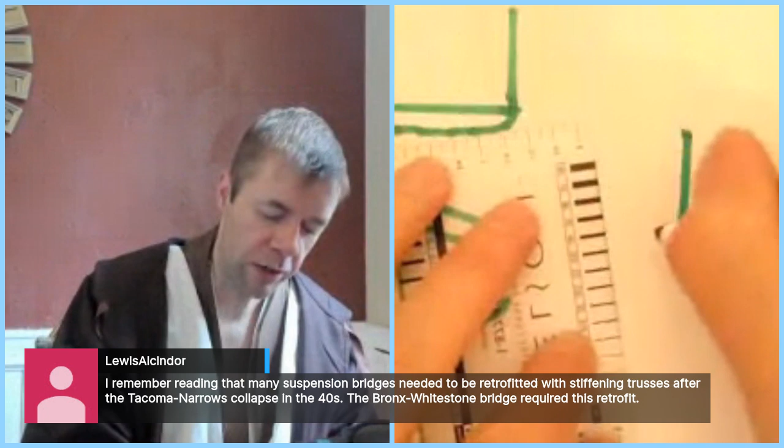You know, when you have a swing, like if you're pushing a child in a swing, you have a person sitting in the swing, right? And you're going to push them as that person goes back and forth, you push them every time - push, again, push - and they go higher and higher and higher.

Well, the same thing happened here, the exact same thing happened here. The wind would start to blow a little bit, it would move just a little bit, and it would get pushed, and then it would go back, and then it would tilt back, and it would get pushed, again and again and again, over and over and over again, and then it fell apart. It shook itself apart, and it actually collapsed.

And the way to fix that was to actually add a deck stiffening truss. So they came inside here and they put a truss, they actually added a truss to the bridge. So this is what the old bridge used to look like, something like this - this very slender, beautiful, amazing deck. And these are the suspenders, the things that hold it in place.

Then what they did is they came back with a structural truss, and they made it really, really stiff. And when they made it really, really stiff, this initial deflection, this initial perturbation, this initial movement couldn't happen - it didn't happen. They decreased that initial movement.

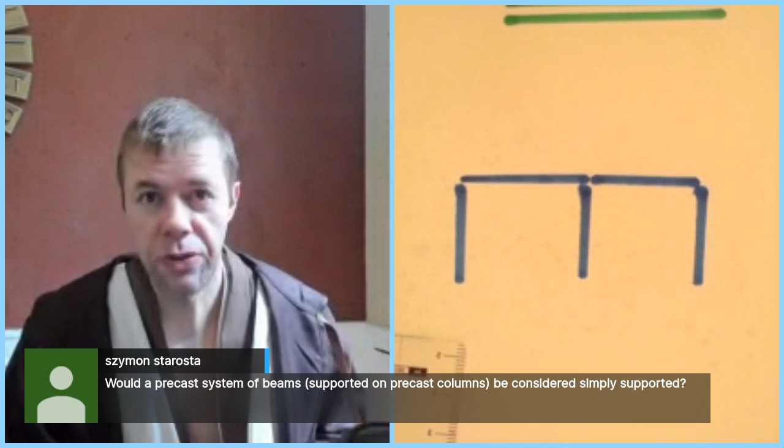Would I consider that continuous, or would I consider that simply supported? Now what you have to do is think about, in a system like this, how is the load going to travel or transfer? And if I zoomed in on this connection, one of these connections where I have, let's say, a column here, and let's just say I have a bearing pad, because most of these are built with bearing pads of some sort.

I know a lot about precast, I've done a ton of precast in my career. I know there's people out there that have done more, but I've done quite a bit. If I have a structural system... you can't see it, can you? Apologize, let me make myself small. Pardon me.

If I have a system that looks something like this, and this is my beam and this is my column, this connection here, then yeah, that is simply supported because there's no bending, there's no moment that's going to be transferred there at all, like none.

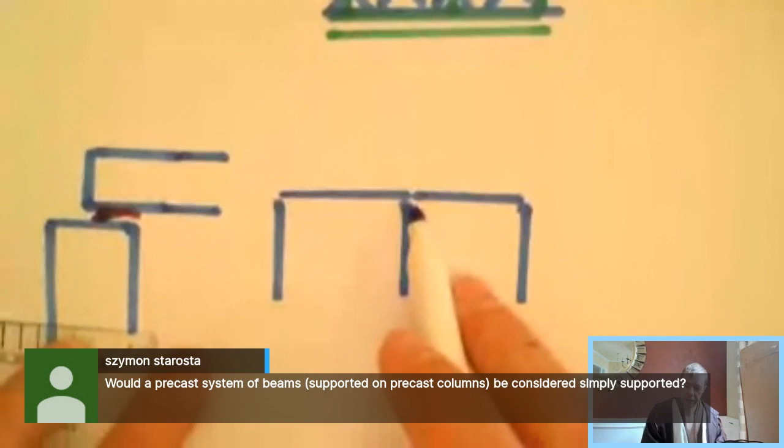But most of the time, let's just say that we added more concrete to this, like a deck on top of it. Now I'm going to draw my detail here in the center. Let's say I have my column, and now we have a beam that comes on one side, or bearing pads on both sides, and beams coming on each side, a beam, a beam, a beam, something like this. Again, that system is going to be simply supported. That's something you would design to be like this, because there's no moment transfer there, like none.

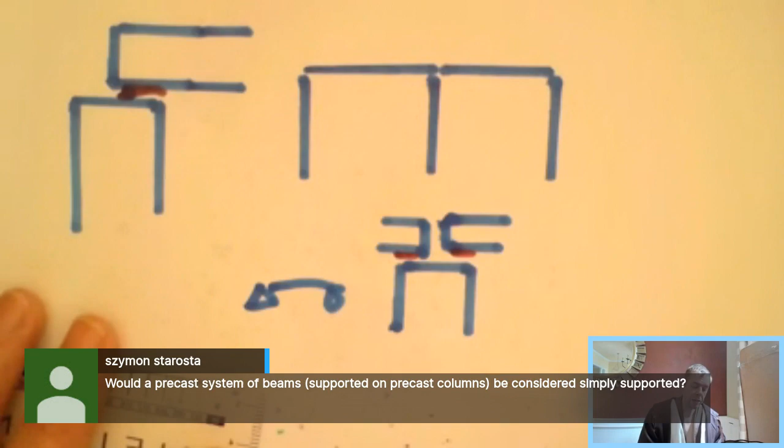Now this is common in bridges. If I'm in a seismic zone, then what I might do is actually add steel to this. I might put steel in the top, right, and I might have steel that comes out of the column that tries to tie these together. And I might encapsulate all of this in concrete, everything's encapsulated in concrete. If I have provided a load path, if I have designed an adequate load path to transfer my tension and compression here from my beam to my column, then I can design this as a fixed connection.

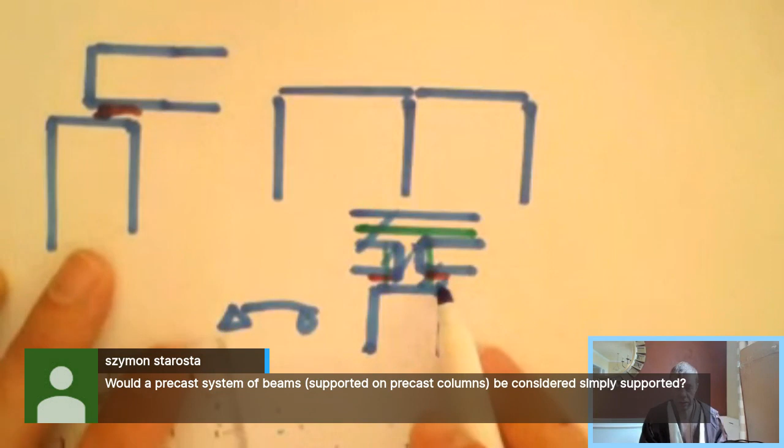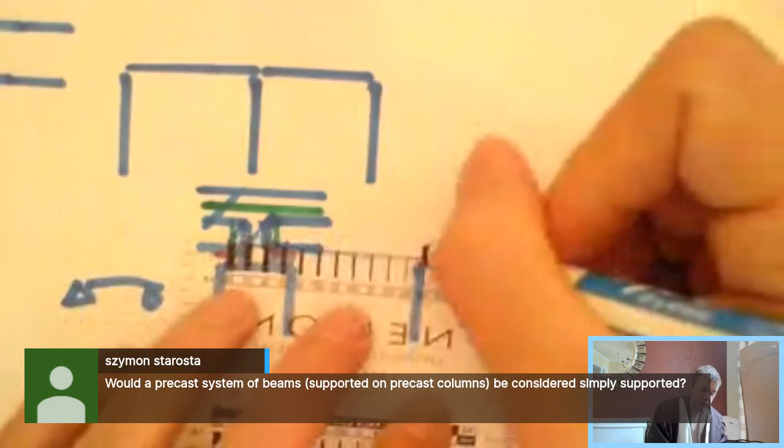But I have to make sure that there's a load path there, and my favorite thing to use is strut and tie modeling to check my load path and make sure that it's satisfactory. But then there are places like in Texas, and I practiced in Texas for a while, they do something a little bit different that they call poor boy continuous. Poor boy means it's not quite continuous and it's not quite simply supported, it's somewhere in the middle.

So if I have a beam like this, I have a beam like this, and I do something like a topping slab on top of it. Let's say I tie reinforcing steel up here, and I put a topping slab on top of the whole thing, cast just a topping slab up here. I don't necessarily encapsulate all these.

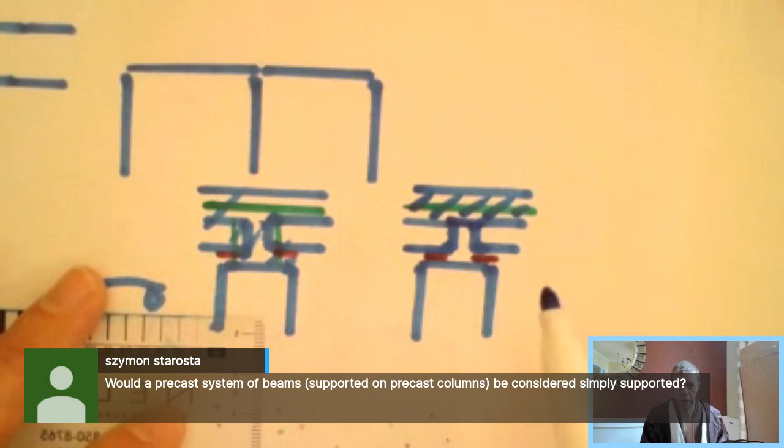My slab's just up here at the top. Okay, that's what they call a poor boy continuous. I didn't draw this to scale—these beams are actually much deeper than this—but that means there's some tension transfer there. Usually what ends up happening is a big crack forms right there, and it pretty much acts like a simply supported beam again.

So I hear you, it's weird, it's challenging to know on some of these structures whether to make something a pin connection, whether to make it truly continuous, or somewhere in the middle. In the end, I'm a big fan of being conservative—unless I know I have load transfer, unless I designed it and I'm sure everything is going to be great, I pretty much always assume it's going to be a simply supported connection. There are videos in my steel notes where I talk about evaluating whether something is a fixed connection or a pin connection, which may be valuable to you—go back and look at those.